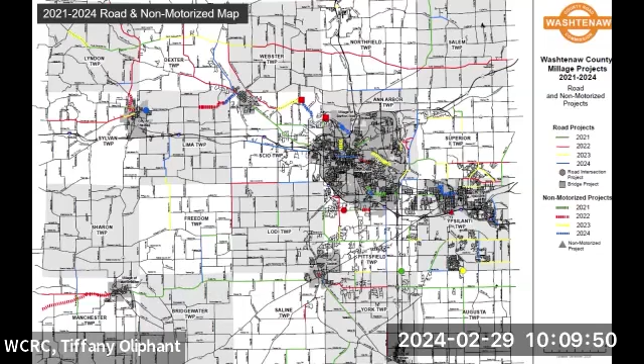As you can see, projects throughout the county. One of the staples is any money raised in that township gets invested back in that township in various projects in various years. And here's a summary of all the work that the Road Commission has been able to accomplish with these projects over the last 3 years, and this last year that we're going to accomplish this year. So we're getting work done on over 218 miles with a variety of work types. We're going to talk later about how we choose those work types, asset management, the strategies behind that. But a lot of investment being made.

And as I indicated previously, the Road Commission gets $4 million a year. Over the course of 4 years, that's $16 million, but we have $18 million of investment. So we're overmatching those millage dollars and investing it into the primary road network.

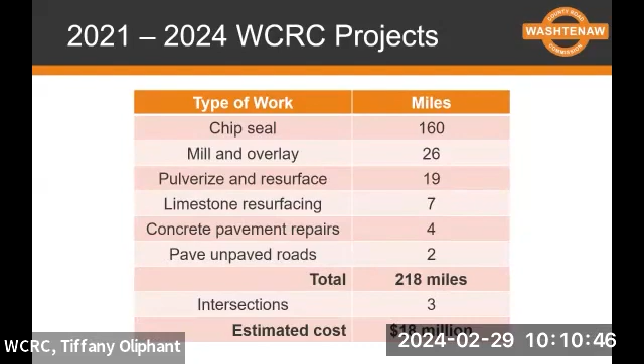So as I described, in 2014, our road condition map, and this is a little tough to see, but the Road Commission assesses the road network, and we're somewhat familiar if you've got PASER ratings. So we'll talk about that a little bit later, but the good, fair, and the poor: over 41% of our road network in 2014 was in poor condition, with only 20% in good condition.

And that's looking back 10 years ago, but in 2023, with the help of this investment of the millage dollars, we now have flipped the script. We've got 47% of our roads in good condition, 32% in fair, and only 21% in poor. So it's almost opposite of when we started.

Here's just a quick run through, an example of some of the projects we accomplished in 21. We were able to resurface Geddes Road between Dixboro and Superior, in Ann Arbor and Superior Townships. Ellsworth Road between Oak Valley Drive and State Road. Miller Road between Zeeb and Wagner in Scio Township.

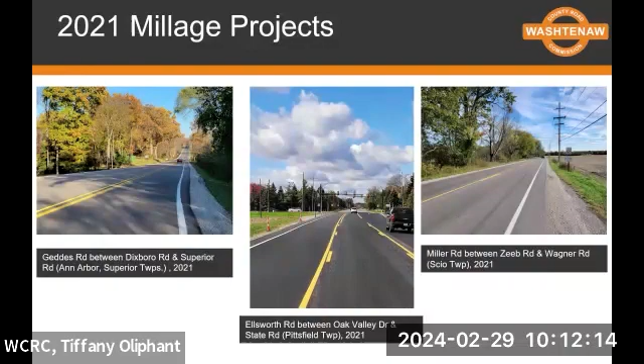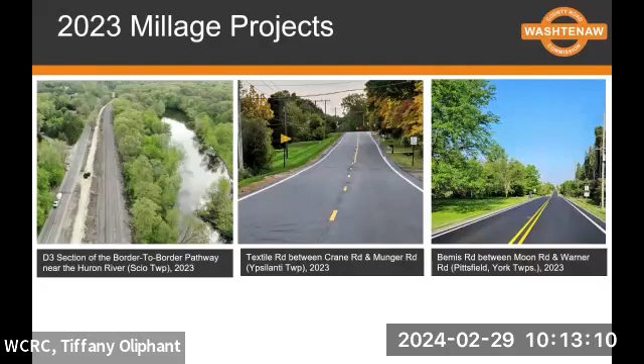In 23, one of the big staples of the non-motorized millage is the Border-to-Border Trail. So we used some of the millage funds to match federal dollars. I'm sure Coy and others will talk about that. But that was a big project, still underway. It's carried over into 24, but we hope to complete that this year. That's a section of the Border-to-Border adjacent to Huron River Drive, east of Zeeb Road. Textile Road between Crane and Munger. And then Bemis Road in York and Pittsfield Township between Moon and Warner.

With that, I'm going to go ahead and turn it over to Coy for a little review of non-motorized projects. Thank you, Matt. Again, I'm Coy Vaughn. I'm Director of Washtenaw County Parks, and we administer the non-motorized component of the millage. As Matt mentioned, we get approximately 1.8 million per year to put towards the non-motorized network in Washtenaw County.

Of that, we put about 1.2 million into the Border-to-Border Trail, which is actually the spine of the non-motorized network across the county, mostly in the northern tier of the county, connecting Ypsilanti, Ann Arbor to Dexter, Chelsea, and up to Stockbridge. The remainder, about 600,000 per year, we put in Connecting Communities, which is a local grant program that allows us to spread the money across the entire county.

So it funds a lot of the projects, especially in the southern tier of the county, that are locally important to the community. So they submit the projects to us. We have a competitive process, and we award them the grants to build locally important connections, and often connections to the Border-to-Border Trail. That also keeps the funds pretty much proportionate to the county population, with the bulk of the population being in the northern tier of the county.

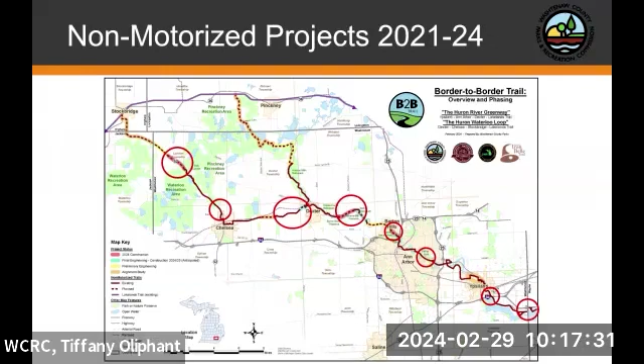We're connecting up through Stockbridge, which will tie into the Lakelands Trail. The Lakelands Trail brings us all the way down through Jackson and eventually over to the west side of the state. And then on the east side, we're working to close the gap through Belleville, so we can connect to the downriver Greenway system, which will get us all the way to Lake Erie. There's already existing trails there. So really making Washtenaw County a destination for non-motorized, as well as meeting the needs of the residents of Washtenaw County.

So this is just some images from some of our recent projects. Part of the B2B was a crossing along Grove Road over I-94. That was a dangerous situation. We were able to work with the Road Commission and other partners to make that happen. Completed that in 21. Chelsea connection along M52.

This has long been a goal of Chelsea and Lyndon Township to connect up to all the state land in Pinckney and Waterloo recreation areas. Again, the goal is to go all the way up to Stockbridge and tie into the Lakelands Trail. And then the other image is one of the many trail bridge crossings of the Huron River as we build from Dexter into the city of Ann Arbor.

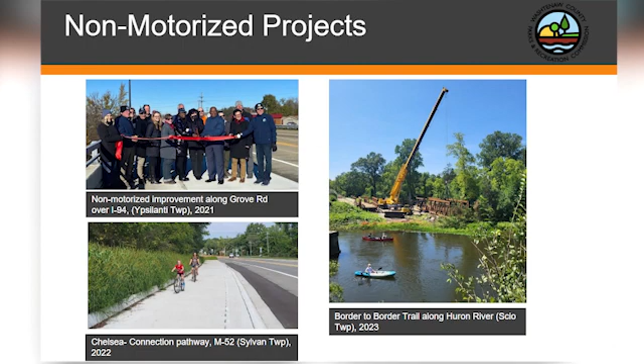All right. With that, I'm going to go ahead and turn it over to Brent. Thank you, Coy, and talk a little about asset management. Thanks, Matt. Thanks, Coy. Again, I'm Brent Schlack, the Director of Engineering here at the Road Commission. And we'll get into asset management.

If you can go on. We always like to start with a definition. So the definition for asset management is the ongoing process of maintaining, preserving, upgrading, and operating physical assets cost effectively based on a continuous physical inventory and condition assessment and investment to achieve established performance goals.

So an example we always like to use is maintenance of your car. Most people own a car, and we all understand that a vehicle has a service life. And to extend that service life, we need to perform preventative maintenance, such as regularly changing your oil or rotating your tires. We all understand the consequences: if we don't change our oil, we'd have to do more repair on our engine or have to buy tires more often. Or the more expensive option would be, if we don't change our oil, to replace that engine. We all know that we don't want to do that.

So we treat our roadways in a similar fashion. They all have a service life, typically 20 years for a roadway. And much like our car, we want to perform preventative maintenance and help extend that service life. If you can go to the next slide.

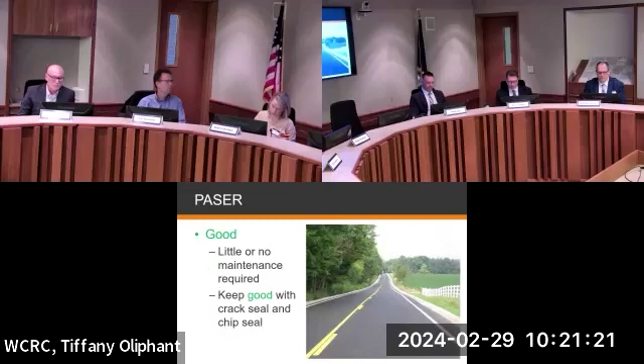Now we'll get into how we rate these roadways. We rate these through a PASER system, and that stands for Pavement Surface Evaluation and Rating. We have trained staff that visually inspect our roadways, and we rate these on a scale of 1 to 10, 10 being our best condition roadway and 1 being our worst condition. We simplify this rating into a good, fair, and poor designation. Good roadways would have a rating of 7 to 10, fair 4 to 6, and poor 1 to 3.

Our primary roads have historically been inspected every 2 years, but now we inspect them every year. And we've utilized this PASER system since the 1990s. So now I'll get into the examples of each category. A good roadway looks brand new. As you can see in the picture on the slide, there's little to no maintenance required. A typical treatment we'd use on a roadway like this would be a crack seal or a chip seal. And we go to our next slide.

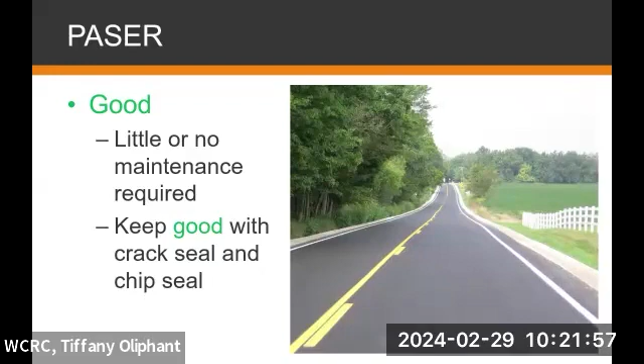And then we get into our fair roads. As you can see from the slide, it's oxidized or it's dried out. You can see that there's some cracks. You can see some crack seal in there. These roadways, typically to keep them fair, we would use a crack seal like you see in the slide, or a chip seal. And then to move them from fair to good, we would use a mill and resurface type treatment.

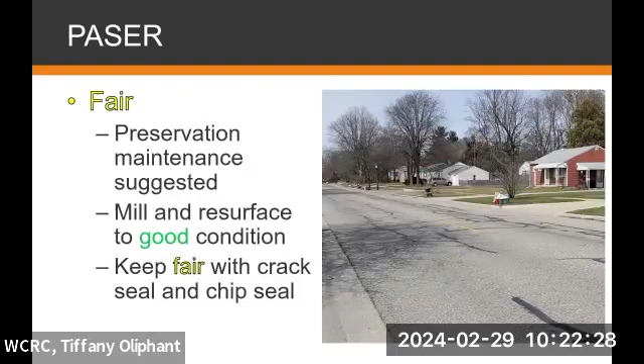Then we go into our poor roads, our poor category, next slide. We all have this poor road that we can probably think of in our minds. These roadways, as you can see in the slide, this pavement has failed. There are potholes. We fill those with patch. We call that cold patch. There's some alligator cracking, and alligator cracking is a shape similar to an alligator skin.

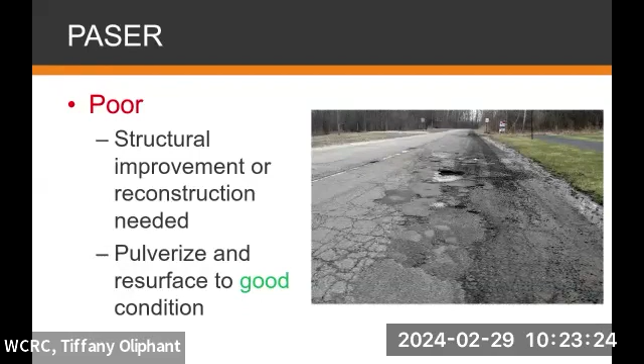And using our asset management strategies, we wouldn't want to do any preventative maintenance type strategies on this road, like a chip seal or a crack seal, because that would be a waste of money. We would be looking at more of a pulverization or a mill and resurface for these type of roadways. So this kind of gives you a feel for how we rate our roads in either good, fair, or poor. And now we get into our condition assessment in the next slide.

Our fair roads, they're kind of variable because we're moving some of our poor roads into our good roads, and we're taking some of those fair roads and using a treatment like crack sealing or chip seal to move them in the good category. And our poor roads, we're using the pulverization, like I mentioned before, or mill and resurface to move those into the good category. So soon I'll hand it over to Adam, and then he'll get into more of the treatments. But in order to have a positive condition assessment, it requires an investment into our roadway system.

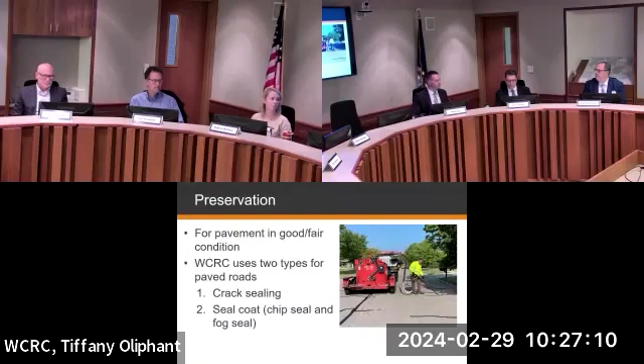And then I'll speak a little bit here about preservation on this next slide. Crack sealing is one of the initial parts of our surface preservation, so our preventative maintenance that we do. So you can see in the picture here, our crew's performing the crack seal project, and that's within the first few years of a pavement's life. As it starts to become oxidized, to show some cracking, we try to fill those voids with the crack material.

So we'll go to the next slide and actually have a nice little diagram for everybody to see here, where the top of the screen, you see the wearing course of the asphalt there, and you see that the black material is put in. That is the crack seal. That's really just to waterproof the road. That's to keep the water from getting in there and freezing and thawing and continually expanding those cracks and eventually

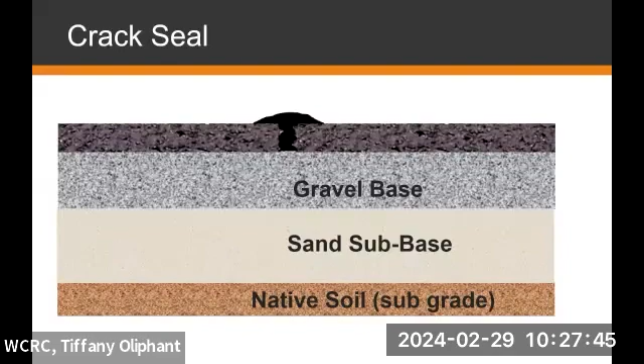turning them into potholes. You see a lot of that information that we post on our website. We talk about that through the winter, where those cracks start to become exposed and become those holes that we refer to as potholes. We'll continue on. You want to keep that infiltration out. And then the chip seal would come after that. So we try to seal the cracking, and then our crews want to seal the entire surface of the road.

So this is really where we use our description to a lot of groups of the sunscreen on your arms before you go to the beach. You want to protect yourself from the sun. Same thing with the road. The road can quickly oxidize just by weathering, especially radiant heat, the temperature created by the sun, and then the sun itself just dries it out. You start getting worse and worse conditions. And so we try to seal that whole surface prior to that.

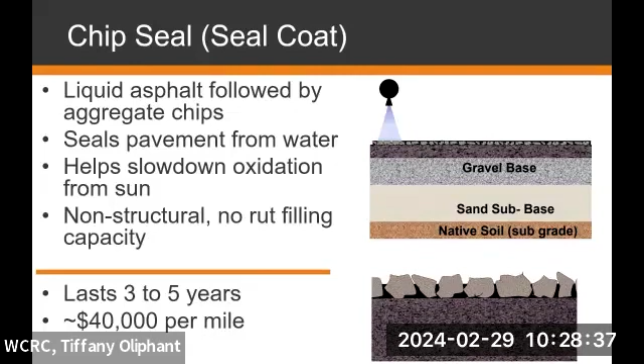So this isn't a structural preventative maintenance. It's not like a paving where you repave it and you add more structure and strength to the road. This is simply just a sealing effort. So we have a little picture here on the next slide that will actually show the crew performing that maintenance. So the liquid asphalt is spread. That's the black liquid you see in front of the machine there. And then we actually spread chipstone, and that's spread by the machinery, and then it's rolled in, and inevitably we sweep it, and then fog sealing will occur shortly thereafter.

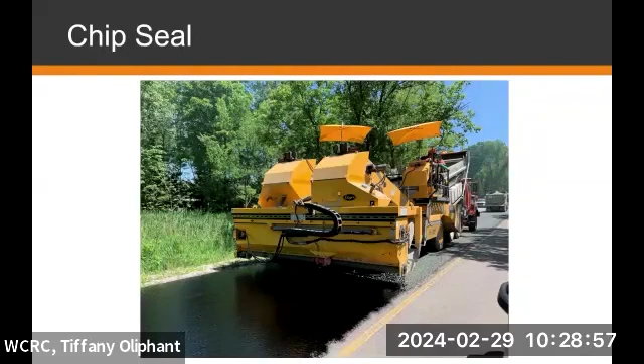And so now a little bit further than preventative maintenance, we're going to talk about resurfacing. So Brent focused on that quite a bit here recently. So there are two types of resurfacing for us here in the Washtenaw County Road Commission. Pulverizing and paving a section of road, that's where a road has made it to the poor category and doesn't have good structure remaining. So we pulverize that road, reshape it, build good subgrade, good structure underneath that road, and then pave over top of that.

And for sometimes our fair roads that are right on the edge between fair and poor, you see our milling and resurfacing program throughout the county annually. So that is where we take the top few inches off, so usually 3 inches or less of the existing wearing course. And then we add another asphalt material. That's the pavement. We pave that in asphalt right over top of that. And then at that point, we essentially start the process over again, where we start patrolling it for crack sealing and then chip sealing again, trying to keep those good roads good as long as we can.

There are some unpaved road benefits to our program as well that we refer to as resurfacing. And that's where most of the township groups will understand from the local road program we complete every year, where we just resurface with the aggregate, whether it be 22A road gravel or 23A limestone. And we have a picture here at the bottom right of the screen that everybody can see that are joining us remotely. That's the process of spreading the material with a contractor. We use our graders to shape that material. And then we inevitably roll that in, similar to a paving project, a little different type of roller, but we roll that in. And then that crew is completed and that road is considered resurfaced.

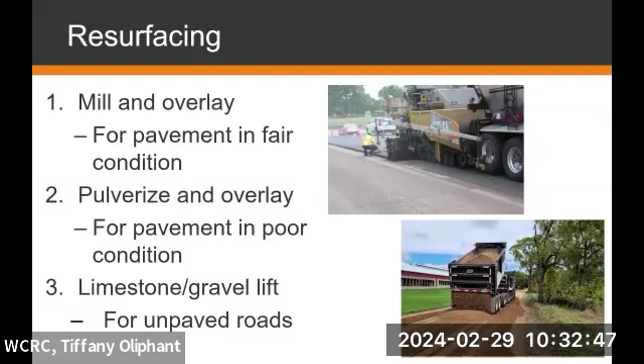Now we're going to kind of go over the 2025 to 2028 millage plan. So what we know, this is not a new tax. As I said and mentioned, we've been doing this since 2014, so 10 years now. It's the beauty of this millage, in my opinion, local dollars invested locally. Doesn't have to go to Lansing and then come back to the county. These are dollars that are raised locally, invested locally.

The other key issue, I think, that's difficult to understand for our taxpayers and voters is no one else is going to solve this issue for us. A lot of talk about infrastructure and funding. In 2021, the Bipartisan Infrastructure Investment and Jobs Act, IIJA, was signed into law by President Biden. It was a great, big investment, and it was a good thing.

But the reality is that the dollars invested in the county road system, we don't see a lot that come our way. Just our normal federal funds, which are significant, but the needs far outweigh the federal funds that we receive. And then there's been discussion at the state level for many years now, Governor Whitmer's Rebuilding Michigan. It's a bond program, $3.5 billion being bonded and invested, but the investment is in our state highway and bridges.

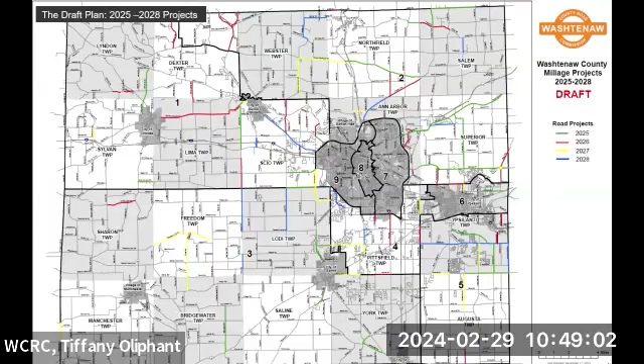So the goals of this plan focused on mainly the primary roads. Again, we put the money back into each of the communities. The biggest driver behind our millage, I've been told it's the gold standard by some, is that it's accountable. We have accountability built in before the voters vote for it. So we know exactly what projects we're going to work on for those 4 years, and we go execute.

We also will provide reporting on a yearly basis at the end of the year. We look at the year in review, look at the work that's been done. We submit to the county for reimbursement. And so there's a lot of accountability, or some will say receipts, for that money that we get through the millage.

It is a variety of treatments that we perform. Again, the name of the game is extending the service life of the roadway through the variety of treatments: chip seal, mill and overlay, pulverize, resurfacing. And then we don't want to forget about our unpaved primary roads. We have approximately 80 miles in our county, so we include resurfacing of those as well.

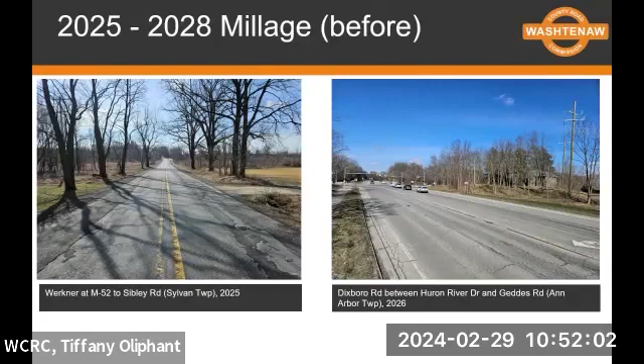So some of the projects that are listed in this plan: Werkner Road between M52 and Sibley, some poor condition pavement there that is going to be pulverized and resurfaced. You see Dixboro Road between Huron River Drive and Geddes Road. That's a picture of fair condition, but we're starting to see block cracking. So that one's time for a mill and resurface.

We've got Bemis Road. There are various sections of Bemis Road, on the border of Pittsfield and York Township, that are scheduled for resurfacing. And then we have Rawsonville Road, both in Augusta and Ypsilanti Township, end of service life, poor condition pavement. This one would definitely be a pulverize and resurface. We've got a few more listed on the sheets, but I will only go through a couple of them. And I'll turn it over to Coy to talk about some of the non-motorized projects in the millage plan.

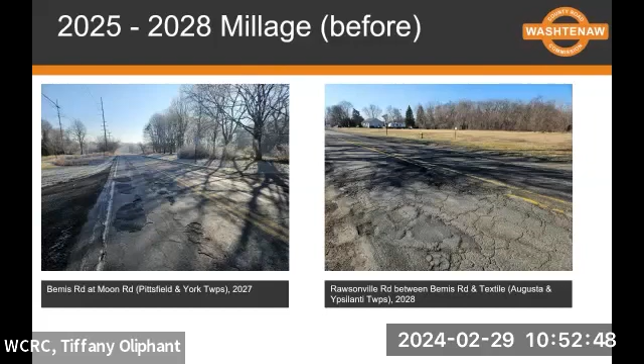So we are planning to put it in the park in Dexter, crossing Mill Creek. And again, this is an important connection connecting our trail system that we built from Dexter to Chelsea. After this segment's complete, there'll be one gap basically in the middle of the Dexter Chelsea connection that we have yet to fill.

The other one, the Barton Bandemer Tunnel, the goal is actually to get that done yet this year. If not, it will likely be in '25. This is a project that has been a big demand of the community for about 25 years now. For the city of Ann Arbor and Washtenaw County it has been a priority, as well as Amtrak and MDOT, because right now there is a surface crossing of the rail line that is so popular, it's one of the most dangerous on the MDOT Amtrak line because of the number of people who are crossing it to get to the park.

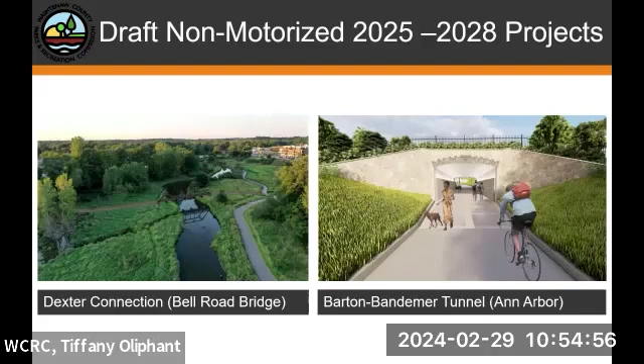Historically, a lot of our Border-to-Border trail projects early on, going back 25 years ago, were in the Ypsilanti area, where we made connections between downtown Ypsilanti, Washtenaw Community College, St. Joe Hospital, and EMU. In more recent years, we switched over to the west side of the county, making the connections around Chelsea and Dexter and up north through Lyndon Township.

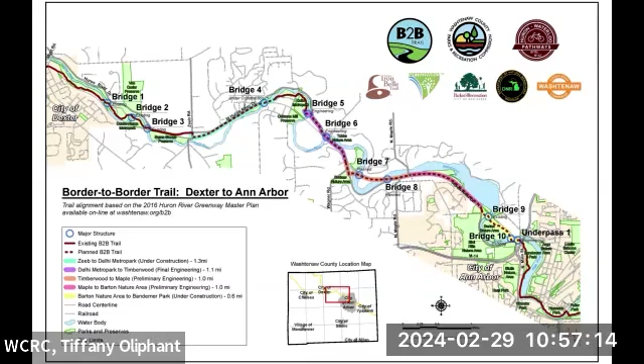And I also forgot to mention, when we were talking about connecting communities, you don't have to look far for a connecting communities project. The Zeeb Road pathway was one of our first connecting communities projects. So that's the focus of the Border-to-Border trail for the next 4 years. And with connecting communities, we will continue to provide funding of $600,000 per year for local communities to complete their important projects.